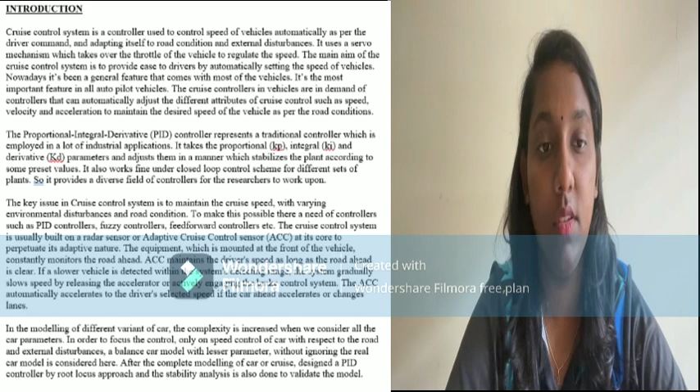Using the root locus approach, the controller constants and the controller's design are finalized. Simulation results through the MATLAB environment validate the effectiveness of the controller design. A cruise control system basically consists of the following devices: vehicle speed sensor, control computer, actuator to set the throttle, cancellation switches and the control button for the driver.

Vehicle speed sensor. The vehicle speed sensor is to measure how fast the vehicle is traveling. The control computer is where the brains of the cruise control system are located. The control computer receives signals from the vehicle speed sensor, then sends signals to adjust the throttle to maintain the desired speed that is determined when the system is first activated.

The actuator receives electronic signals from the computer and turns them into a mechanical motion that controls how much the throttle is open. Cancellation switches turn the cruise control system off. The user control buttons allow the driver to turn the cruise control on and off.

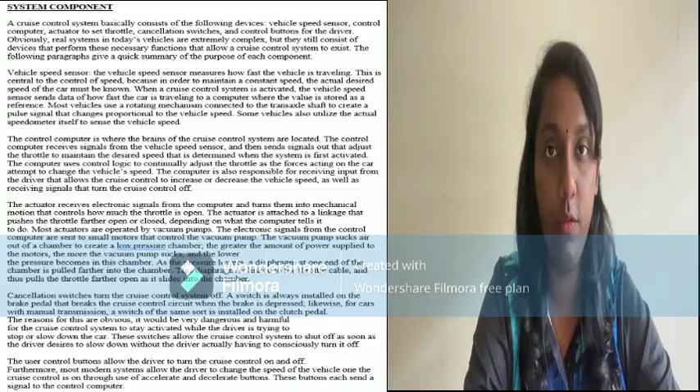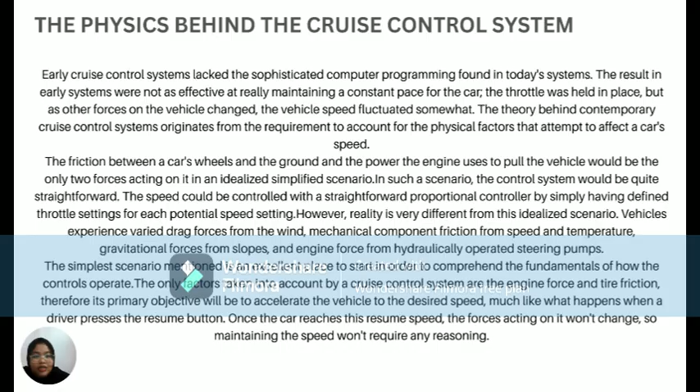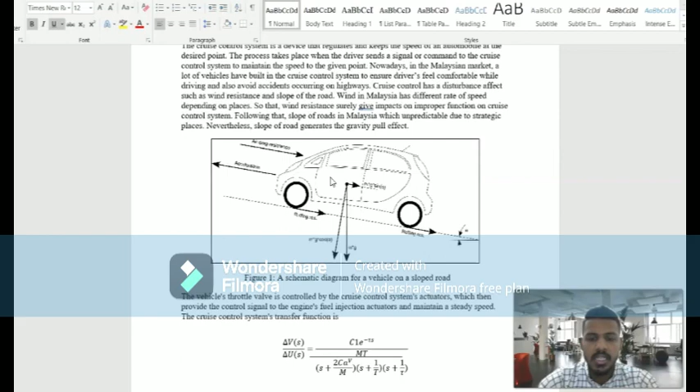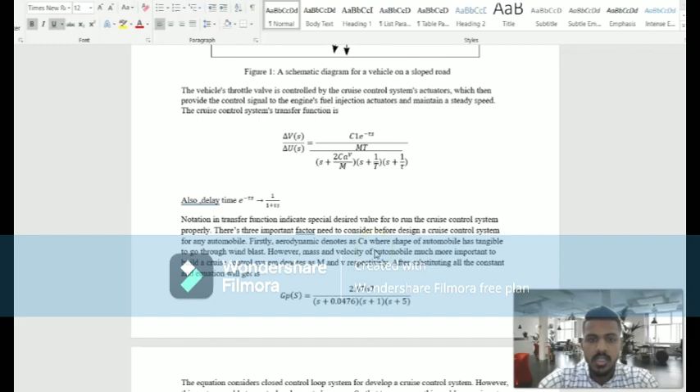So for the project Automobile Cruise Control, I take over the methodology, result and discussion part. For the methodology, we choose a car as an example to run our cruise control system. So our transfer function we obtain from this major equation. After we substitute all the values, we obtain the transfer function as here. Our transfer function's main focus is throttle to the velocity of the car, because velocity also includes mass and the gravity since it's a slope.

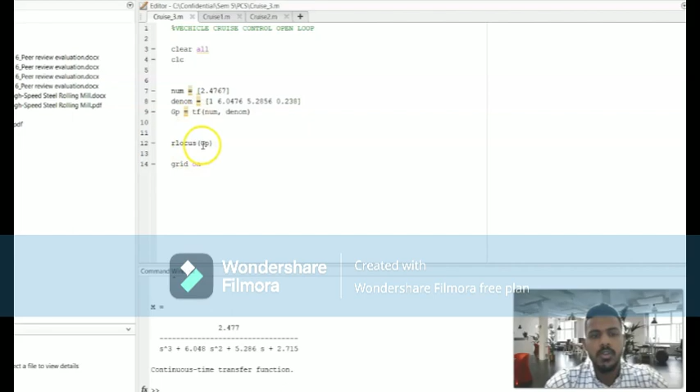So followed by, we go to our MATLAB. Now let us see our control system of the automobile in MATLAB coding. So here is the coding. First numerator, denominator, we already stated, and then the transfer function we obtain. In root locus, we need to define it. So let us run. Here is the result. Since our transfer function has no zero and got 3 poles, which is 1, 2, 3.

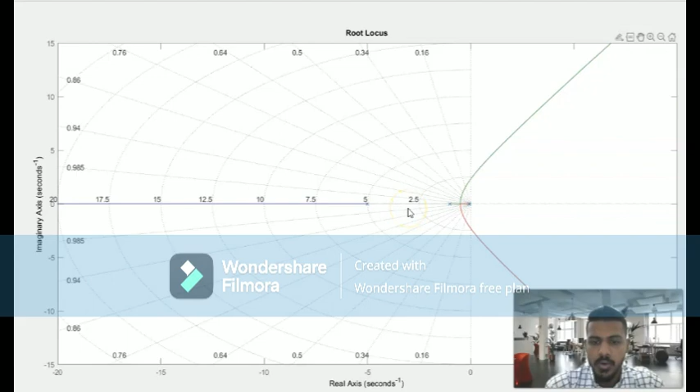So there is no overshoot, which means our cruise control system, once the engine starts and then reaches our particular limit around 20 km or 30 km per hour, it's just a continuous rate, which means there is no stopping to the user. So this is where it's not advisable for our current cruise control system.

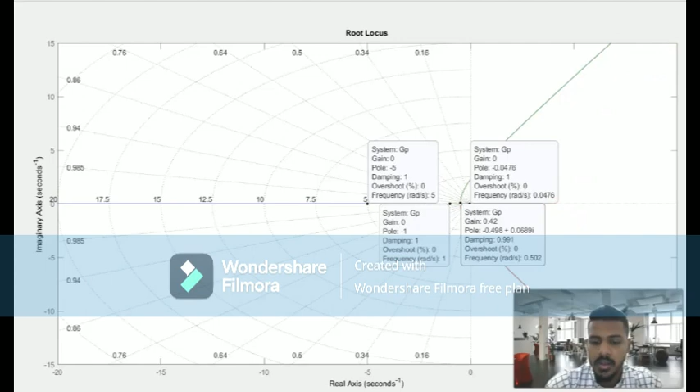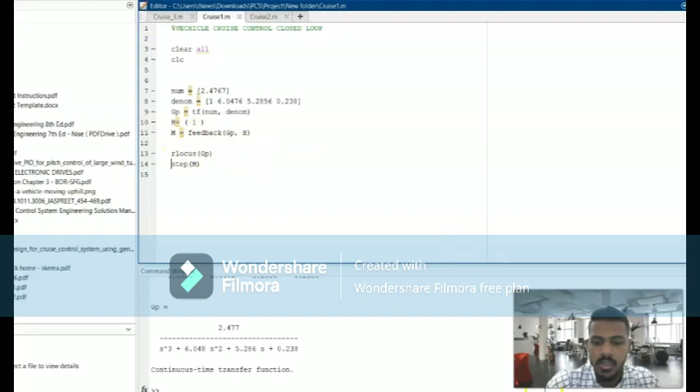To improve that, we try to simulate with a feedback system. So here is our feedback system. The only difference, we add H equals 1, which is unity gain, and then obtain our result. We run our transfer function in terms of a feedback system, which is unity gain. So let us see our result. So here it is. Again, there's no overshoot yet, but the damping factor is 1, which indicates the unity gain.

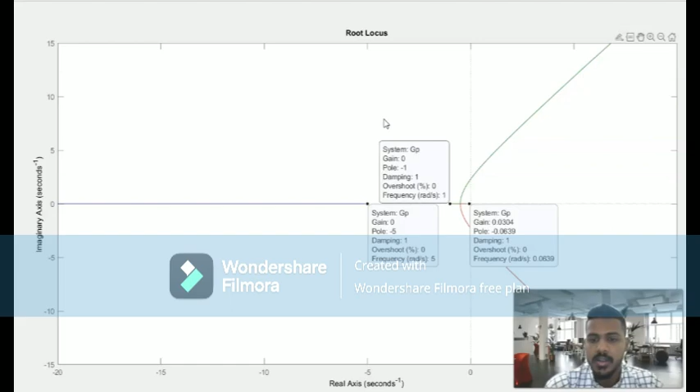So for the user, once they press the cruise control button, the car will accelerate. But the thing is, they can't control it, but it keeps progressing. Once they accelerate, the car will keep increasing its speed, not maintaining a level of speed. So to overcome this situation, we come up with a PID controller, which is Kp, Ki, Kd.

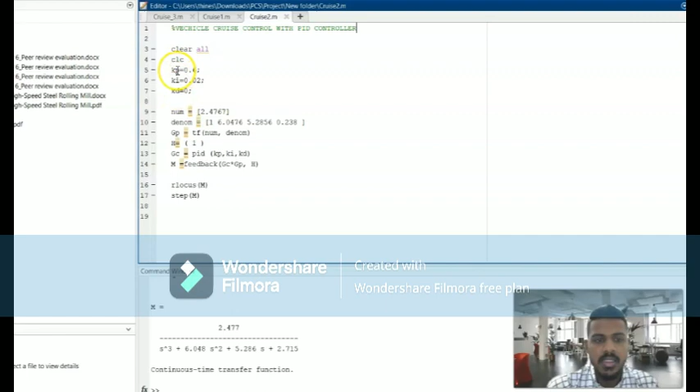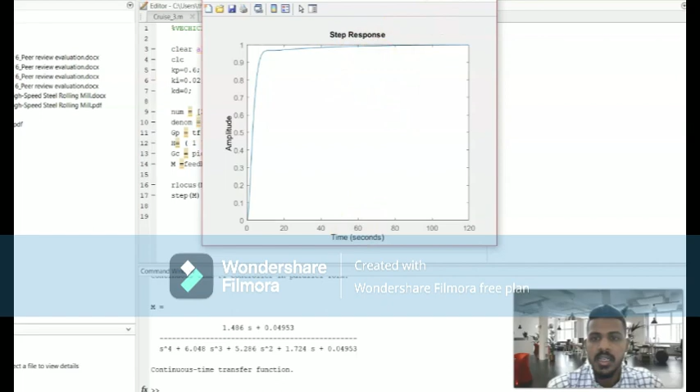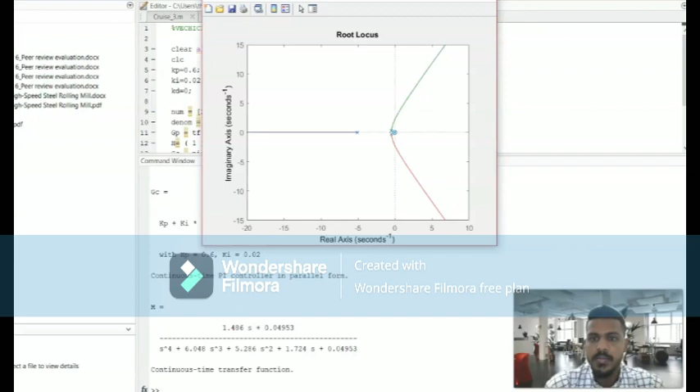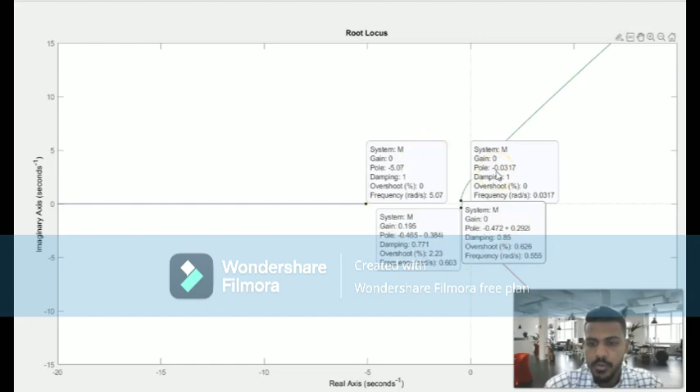So compared to the previous open loop, now we can see the improvement, which is the car automatically reaches steady state around 60 seconds, which is 1 minute. So we can see the clear improvement. Now we try to simulate in root locus terms. So once we've done the simulation, this is how our transfer function will be, and also our root locus. So just now there are no zeros on our transfer function. Now, because of the calculation, we have obtained all 4 points, which show the improvement in terms of overshoot and the damping factor and frequency.

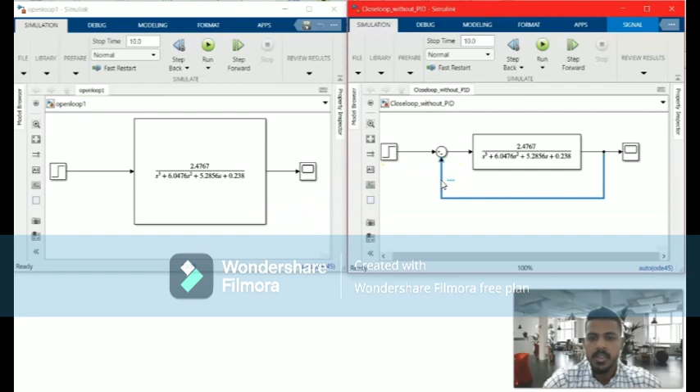So now we do our automobile cruise control system in Simulink MATLAB. So here's our model. On your left hand side is an open loop, and then this one is a closed loop. The transfer function we obtained is the same as the previous one, and also goes to here. The only difference, we got a feedback system. So let us run the simulation. So here we obtain results for the open loop and also closed loop.

For the open loop, the result after 1 second, the graph continues straight, which means rising up. In terms of a real world cruise control system, there is no stopping or it cannot control the cruise, which is once the user accelerates, it just continues without any lag or stopping. But at the closed loop, there is a difference, which is until 2 seconds it starts rising up, and then from the 7th until the 10th second, it's performing a little bit of a drop, but also it's a steady state.

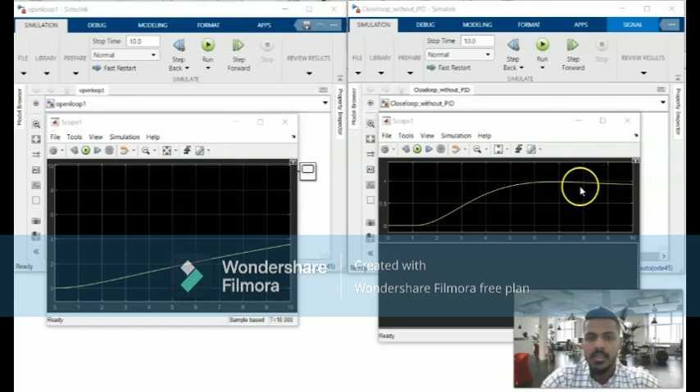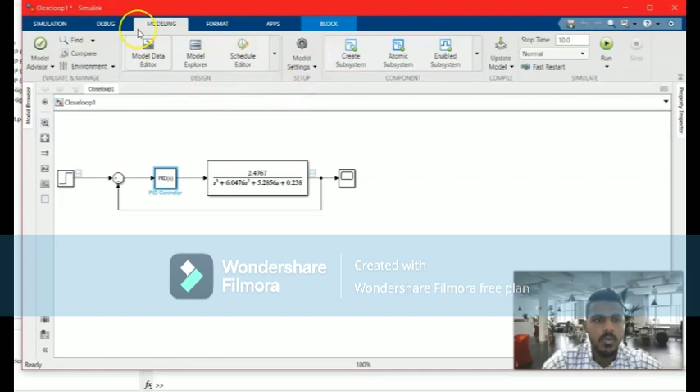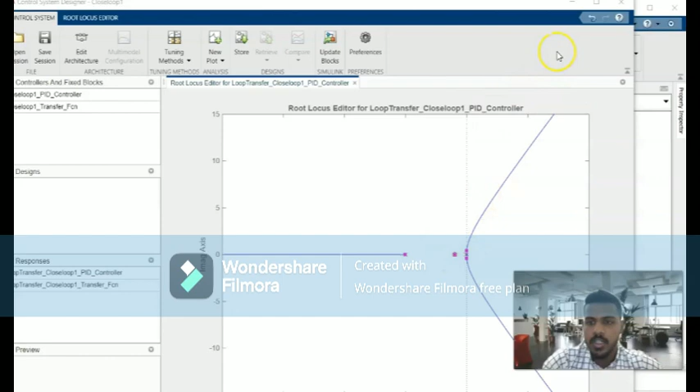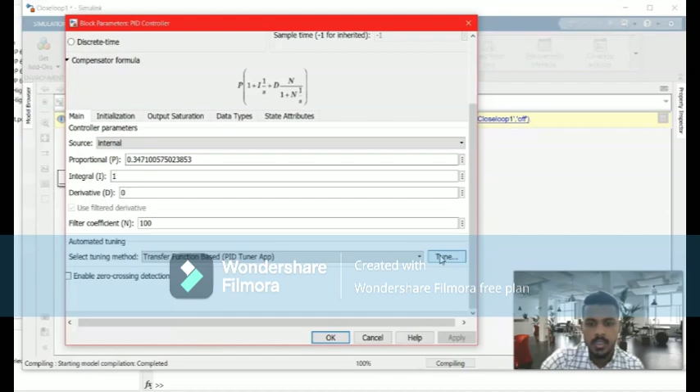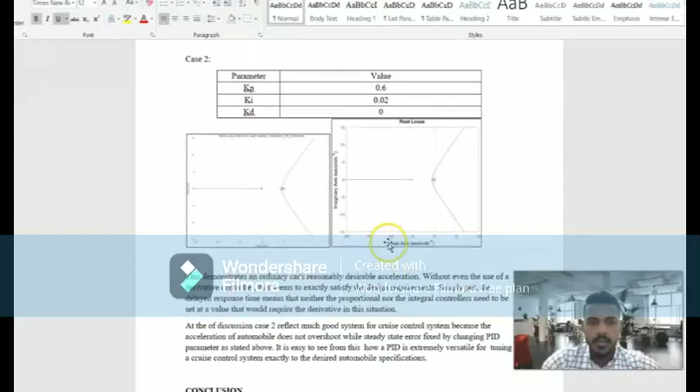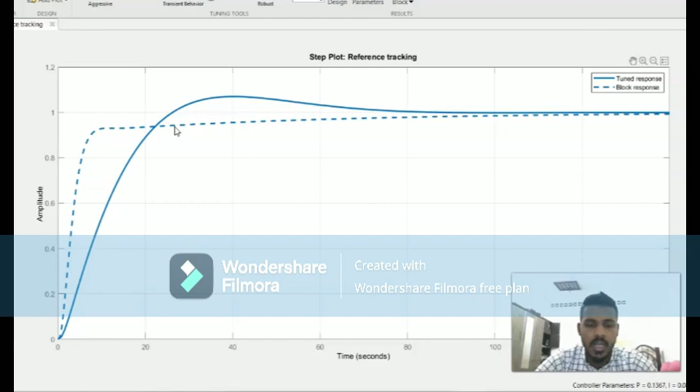So if you notice there's an overshoot, which means it's not a good recommendation for a cruise control system. By right, our dotted line, which is the block response, refers to a good steady state, and also there is no overshoot. So what we emphasize, we should go for a cruise control system with no overshoot. The benefit is once the user starts the engine and accelerates to a particular kilometer per hour, it's steady state until the cruise control is taken over by the user. So here we set the improvement after a few runs of changing parameters. So that's all from me.

Thank you. So basically, the cruise control system is one of the mechatronics ideas used in cars to enhance comfort and safety while driving, especially for the driver. Driving with a control system will help increase safety, and it's better for the environment. The cruise control system electronics are attached to the vehicle's main computer processing during the primary production line. Cruise control is a type of control system that uses an input, output feedback loop, and computer processing. And the inputs and transistors in the cruise control system are fairly simple devices.

The reason for the comparison was to determine which situation is better for car safety and to warrant an improvement in a car cruise control system. And we chose case 2 after fixing the steady state error, which is more suitable to the car system. The cruise control system has many other advantages: it ensures driver safety, prevents speed limit violations, and is superior to manual transmission. And the automobile will see a more steady speed as a result of the cruise control system, which reduces fuel consumption by relieving the engine's need to constantly race and burn gasoline.